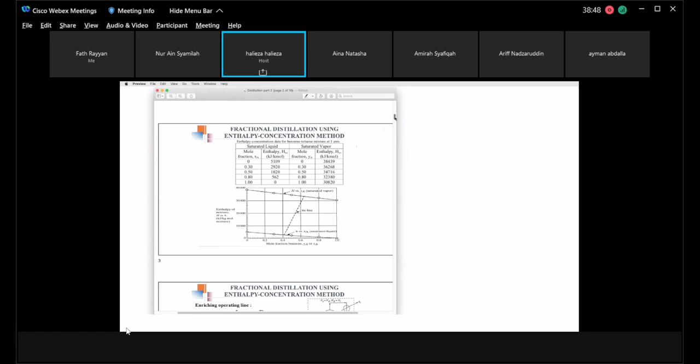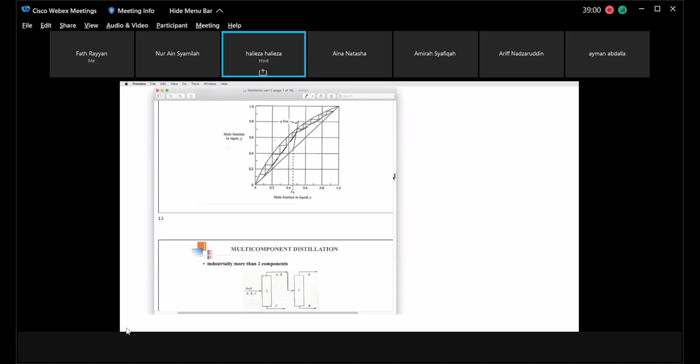Okay, so these are the values that you obtain after you have done the calculation at different values of mole fraction for vapor and liquid. Now I'm going to go straight to what we're going to do. This is how it's supposed to look like. Let me zoom in. It still looks as if it is McCabe-Thiele. The only difference is that your operating lines, in this case, look as if they are straight, but they're supposed to be a curve.

The broken line here is the straight line, which assumes equimolar overflow or constant molar overflow. The dotted line is straight. This is the one that we have done using the McCabe-Thiele method. The solid line here is the line that you obtain using the enthalpy concentration method. It's not straight. It looks almost straight because for benzene and toluene the latent heat is almost the same, but it's not. So that's why it looks almost straight, but it is not straight.

Your Q line will still be the same. It's still the same method that you use in the McCabe-Thiele method. But the only difference is that now the operating line for the enriching and the stripping is no longer straight. You cannot just get one point at XW and another point at the intersection of the enriching and the Q line and draw a straight line. It's no longer straight.

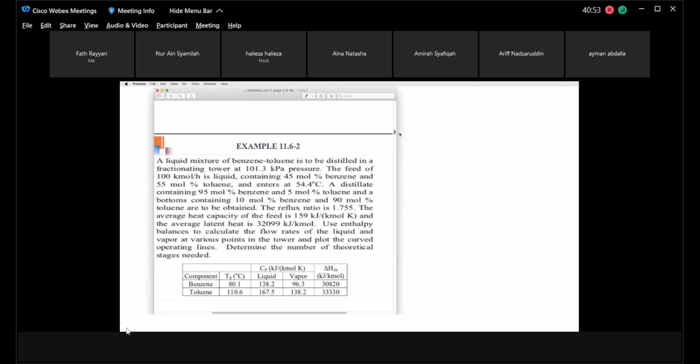Once you manage to get your operating lines, which are curved, then you'll be able to do the steps. The number of steps that you obtain will be the number of stages that you need for the distillation. So let's start. Let's look at how it's going to be done. This is from example 11.6-2, if I'm not mistaken. Because it is a trial and error method, we have the procedure here.

So this is for the enriching operating line. Over here we have our column. We have our condenser, which will have a QC there. Subscript C is condenser. Capital R is for reboiler. So using the material balance here and the energy balance here, you solve them simultaneously, then you will be able to get the operating line.

So first of all, based on the reflux ratio given, you should be able to calculate V1. I need to have my, okay. You should be able to calculate V1 based on L once the reflux ratio is given. From the previous material balance calculation, you already managed to get D, the distillate flow rate. So R is equal to, let me try to write, R is equal to L over D. Not a good handwriting.

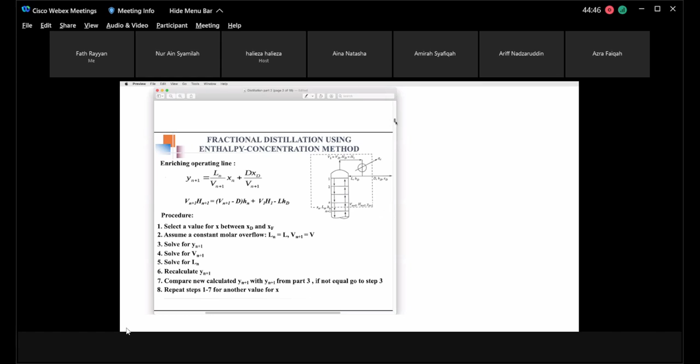And how do you calculate the enthalpy n+1? You will use the equation for the saturated vapor, this equation. You already know your Yn+1. The values of the rest of the variables you can get from the equation, except for the boiling point of your vapor.

The boiling point of your vapor you can get from the diagram of temperature versus concentration. I'm not sure whether you can get it over here because there's no temperature over here. So you should be able to get the temperature of your mixture from the diagram, which is, if I'm not mistaken, figure 11. At the very beginning of our lecture we had that diagram, when we were talking about the Ponchon-Savarit method. So you should be able to get the temperature of your mixture at the composition YA, and then you'll be able to calculate your enthalpy.

And from that enthalpy, you have this value now, based on the value you calculated from the material balance. You can calculate the enthalpy HD because you already know the composition XD, using the equation for the liquid enthalpy. You can ignore the heat of solution. You can get the top temperature of your column again from the temperature versus concentration diagram because you already know the mole fraction of your distillate, XD. Okay, so you should be able to calculate HD now.

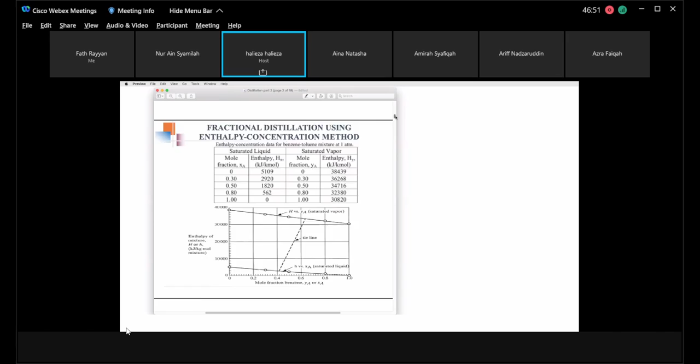So now substitute it into this equation. You have that HD there. Okay? And you can calculate H1. Where is H1? Because you assume that Y1... okay, now I need my pointer. Okay, your Y1 here.

Oh dear, very difficult doing this lecture using the computer.

Y1 is here. Okay, Y1 is going to be the same as XD. It's the same value. So from this value of XD you should be able to calculate H1, but don't use the small letter enthalpy for the liquid; use the enthalpy for the vapor. So let me go back to the equation. Just now you calculated HD using this equation. Now you're going to calculate capital H1 using this equation, because Y1 is going to be the same as XD.

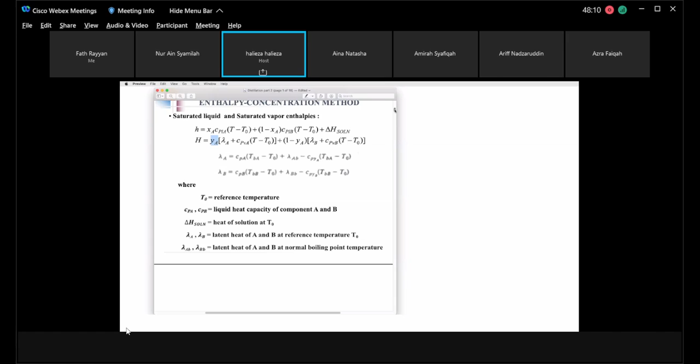This is quite difficult, isn't it? Following a lecture like this. Anyway, you already managed to get that.

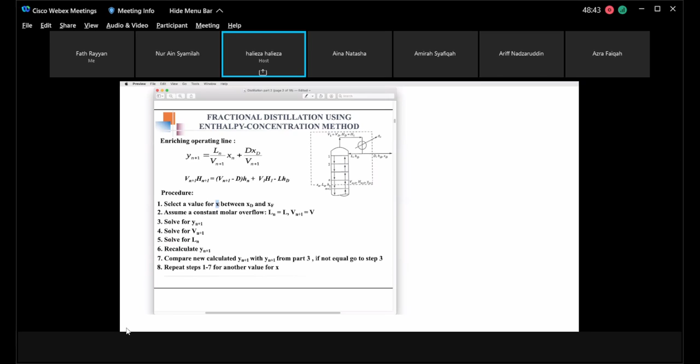Okay. Hn. Where is Hn? It is the value that you get from this value x. That x is the one you will use to calculate hn; this is the x that you choose for yourself. You substitute the x inside this equation. Small h here, that's the x. You will calculate your small h here. So once you manage to do that, you will have enough information to recalculate Vn+1. Now you have to solve for Vn+1 from the energy balance.

Okay. So when you manage to get Vn+1, you should be able to use the material balance to calculate Ln. Don't use the equation yet. Use your material balance. This is Ln, the bottom part is Ln. Hold on, I need my pointer.

Okay, your Ln is here. You managed to get your Vn plus 1. Okay, your D, you already know. So if you do the material balance, Vn plus 1 you already managed to get. Your D is already solved for, so you should be able to solve for your Ln. Okay, so that's the number 5 solution.

Once you manage to get Ln, you substitute it over here. From step number 4, you already managed to get this. Okay, you managed to get your Vn plus 1. Your D is the value that you initially calculated based on the material balance earlier. So you should be able to recalculate that value now. Initially, you get that value by assuming a constant molar overflow. You get that value from number 3.

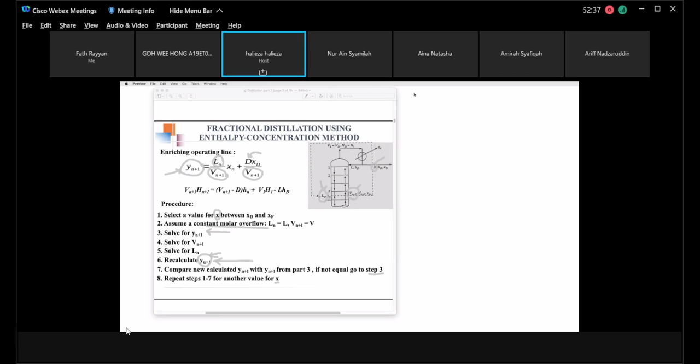For the enriching operating line, is it still a straight line? It's no longer a straight line. It's a curve. For the diagram that I showed earlier, it looked like it's a straight line, but it's not. Okay, it is slightly curved.

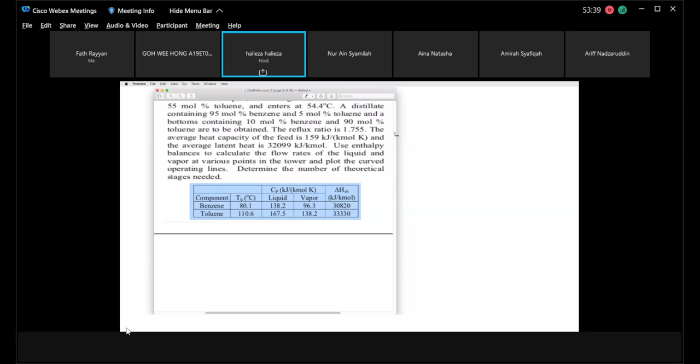The latent heat at the boiling point is here. That is the latent heat of component A, for our case, benzene, at its boiling point. And this is the latent heat of toluene at its boiling point, which is given in the table we just looked at, in the rightmost column. That's the value.

Okay, but this value you have to calculate using the equation. So this is where you will substitute it here. And for this value, you will substitute it over here. You need to calculate it using this equation. Okay, the CP just now, that's for the vapor of B.

And this is the CP of, what's the difference here? This is for liquid, sorry. This is for liquid, this is for vapor. And this one with the subscript Y is for your vapor. So those are the two different CPs: denoted by Y for vapor, and without any subscript Y, that's for the liquid. So this is another way of looking at it. This is for liquid.

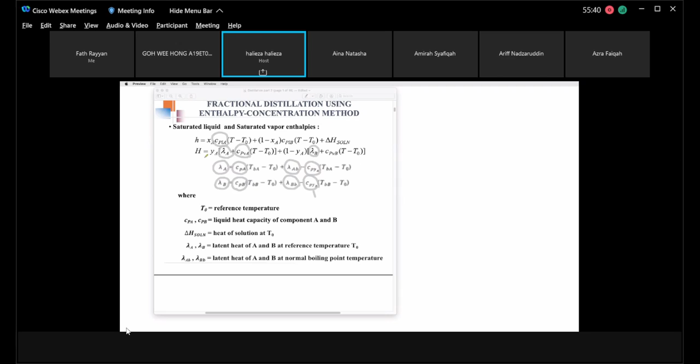And where is the vapor? This is the vapor. This is another way of writing it. I must have got this equation from a different source. That's why there's no consistency in the nomenclature.

Okay, so let me undo this. Is there any way I can undo it?

So for your stripping section, you will also do it by trial and error method, but obviously the material balance and the energy balance will be different. Okay, so your Q line is still the same. You use the same method as what we have done for McCabe-Thiele. It doesn't differ. It's still the same. Let me go back to the notes on the stripping operating line.

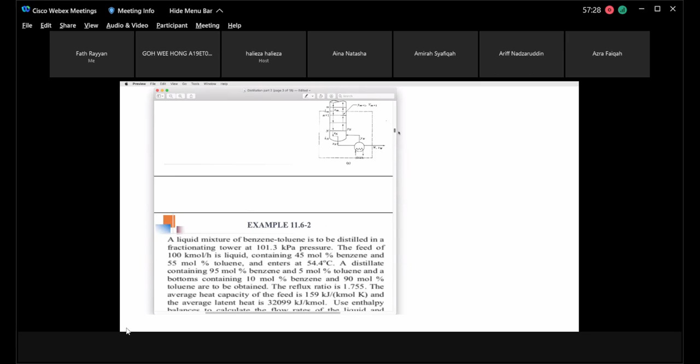Okay, this is for the stripping operating line. Oh dear, why can't I highlight the whole thing? This is your stripping operating line. Again, you have to find the LM, VM plus 1 as what you have done for the enriching section. Your W, obviously, you already know from the material balance calculated at the very beginning of the problem. So again it is a trial and error method.

Once you manage to do that, you check your earlier calculated value and the new calculated value. If it's the same, then you got your pair for the X that you assume. Again, you have to assume an X which is between XW and XF, because this stripping section is from XF to the value of XW. So your X must be between these 2 points. Whatever X you choose, you do the same thing as what we have done for the enriching section and recalculate your Y, and check it with the earlier calculated value. If it's the same, then you have your pair, the coordinate X and Y for your first point.

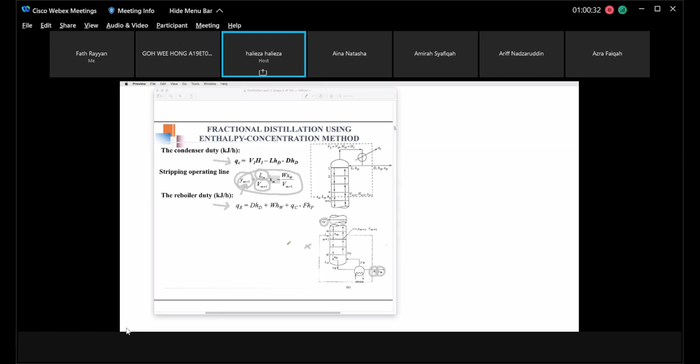Even though the iteration sometimes is only once, so you don't have to do a lot of iterative calculation, you still need at least 4 points: 2 coordinates for the stripping and 2 coordinates for the enriching, in order to have enough coordinates to draw your curved operating line. So you will repeat the same procedure for the stripping section, just like what we have done for the enriching section.

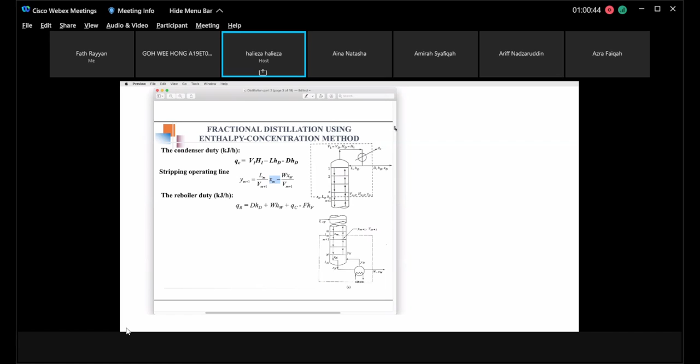So again, compare with the previous McCabe-Thiele method and the enthalpy concentration method, the answer is quite a bit different. If you look at the solutions from the textbook, if you use the McCabe-Thiele method, whereby you assume equimolar overflow rates or equal molar flow rates, you get 9.9 stages. But if you use this enthalpy concentration method, the answer is more than that. It's about 10.4.

It's 1, 2, 3, 4, 5, 6, 7, 8, 9, 10. 10.4. So there's an extra... oh, sorry, about an extra one stage because of not assuming constant equimolar flow rates. When you do not assume constant molar flow rate, which is the actual case in this example, you get one extra stage more. Because initially it was only 9.9. Now you got 10.4. So it's an extra stage.

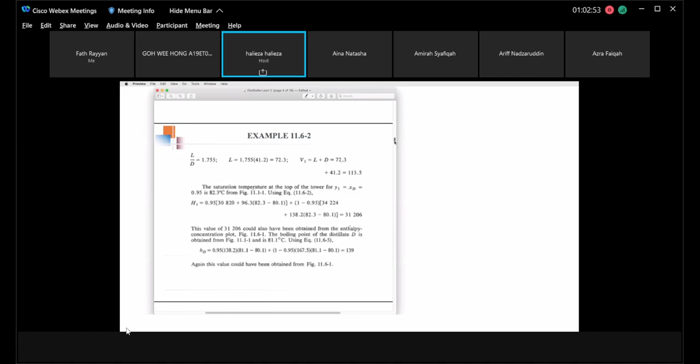Due to the fact that the latent heat of benzene and toluene, they are not the same. Okay, so let me point that out. This is the latent heat of benzene, and obviously it's not the same as that of toluene. There's a slight difference there. So due to the slight difference, the operating lines still almost look straight, because the latent heat is quite close.

So any questions? You can have a look at example 11.6-2 to get an idea of how it's supposed to be done. But unfortunately, this method is only for a binary mixture. That means you have only two components. You cannot do it for multi-component. This method is more realistic compared to McCabe-Thiele, because McCabe-Thiele assumes that the latent heat for both components is the same, which is not always the case. But McCabe-Thiele is easy to use.

So if the latent heat is almost the same, the difference in the number of stages is not that much if you are using the enthalpy concentration method, as we have looked at in this example.

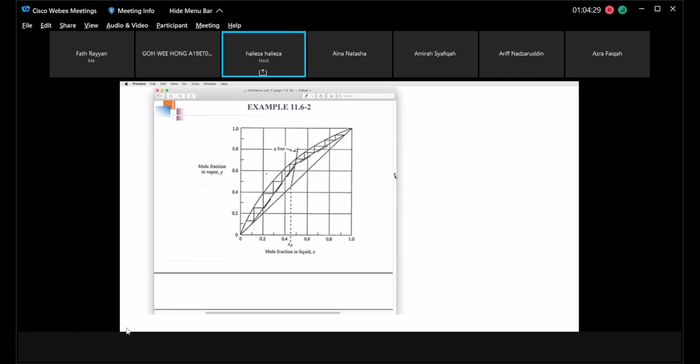Okay, so as you can see, the solution is pretty long. How many slides? It's pretty long. So I'm just mentioning the procedure on how to go about it. But there's how many slides? That's a very long solution.